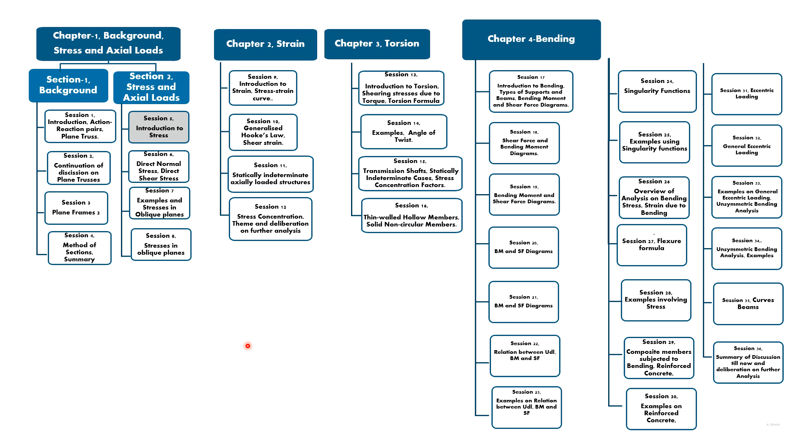Here we give a preliminary understanding of the scope of mechanics of materials. Mechanics of materials discuss and study the effect and behavior of structures under different types of loads and different magnitude of loads.

Structures are built to withstand loads. These loads may be axial loads, moment, torque, shear, or a combination of these.

The study of mechanics of materials can be categorized in 2 ways. As per the first categorization, mechanics of materials can be considered a study of strength, deformation, or stability.

Since structures are subjected to loads, one needs to understand the strength of such structures. Structures deform under loads. Such deformation cannot be excessive.

Excessive deformation adds to safety concerns. Excessive deformation may result in malfunctioning of equipment as well. Long, slender columns buckle under compressive loads, so we need to study stability as well.

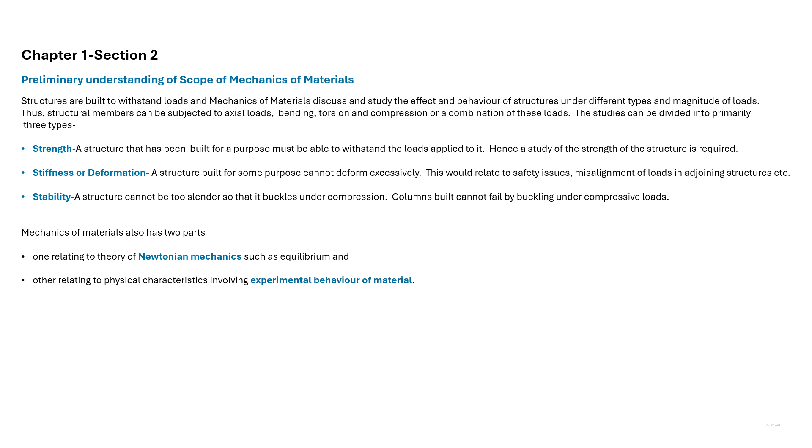Loads and stress cause deformation and failure, and we'll study deformation and failure. Loads and stress affect stability, and we'll also study stability.

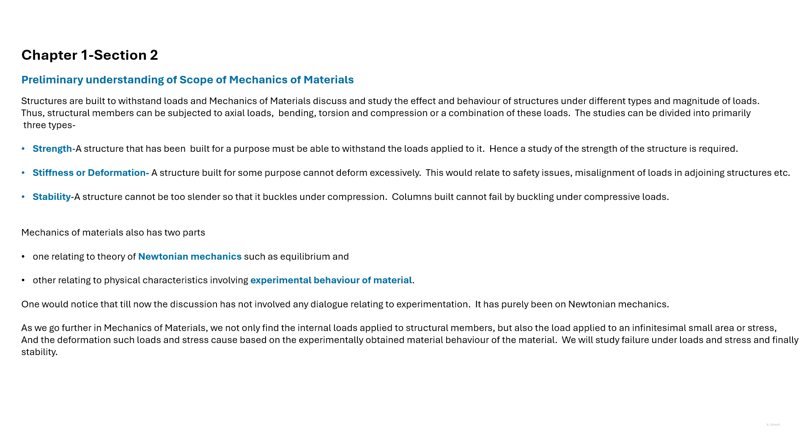Here we discuss the method of sections for arbitrary bodies. We have earlier discussed the method of sections for plane trusses. In order to discuss the method of sections for plane trusses, we initially considered the case of a rope subjected to tension T. So here we will recap the discussion first and then go to method of sections picking arbitrary bodies.

So here we have a rope AB and it is subjected to a tension T. C is any point, any arbitrary point within AB. Now if you cut the rope at C and introduce a spring scale, the whole rope still under tension T, then the spring scale will show a tension T.

That means that AC is under tension T and CB is also under tension T. And there's an action-reaction force pair that is acting at C.

Now instead of taking a section at C, if we consider an imaginary section at C - now C can be any arbitrary point - then at the point C, there's an action-reaction pair acting. So AC is being pulled internally by CB using tension T.

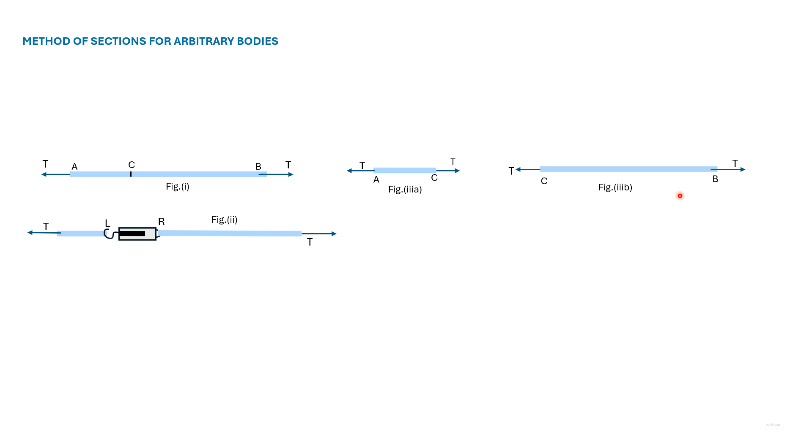In the earlier slide, we discussed method of sections. Till now, we have used method of sections to analyze plane trusses only. Here we consider method of sections applied to an arbitrary body. So this is an arbitrary body on which there are 5 forces acting, and we take the section ABCD.

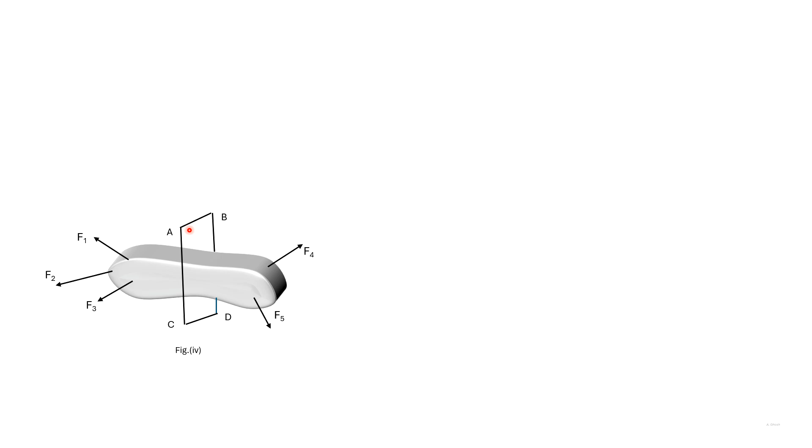Here we have the 2 portions. Then there will be action-reaction forces acting where we have taken the section. So here S1 and this S1 are an action-reaction pair. S2 and S2 are an action-reaction pair, and same with S3.

The number of internal forces is arbitrarily chosen here. The left portion will be in equilibrium under these external forces and these internal forces.

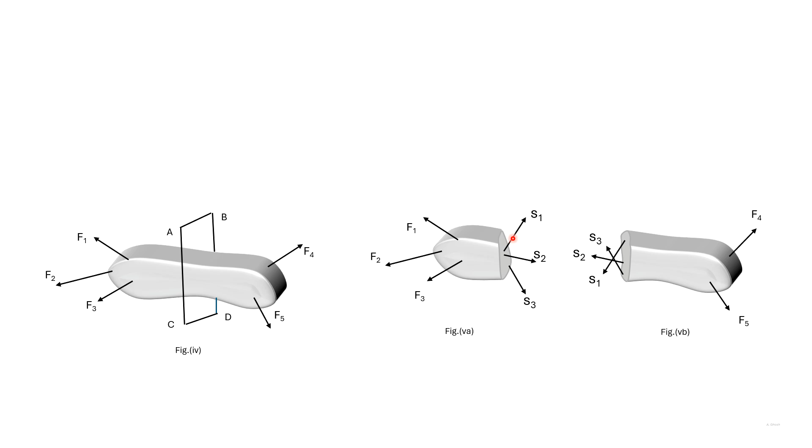The method of sections can be applied not only to forces like here, but also to moment or torque applied to bodies. A common phrase related to method of sections is, if the whole structure is in equilibrium, then any part of it, considering internal forces, will also be in equilibrium.

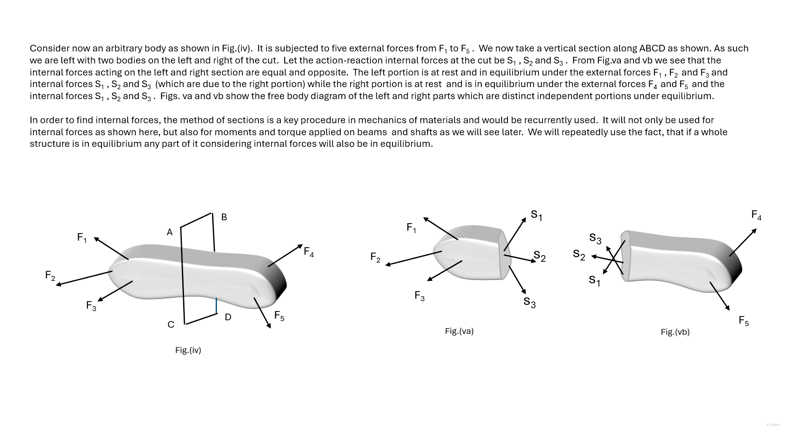Before we extend our discussions any further, we would like to mention that we assume that the material we are dealing with, when we are considering the different bodies, is homogeneous and isotropic.

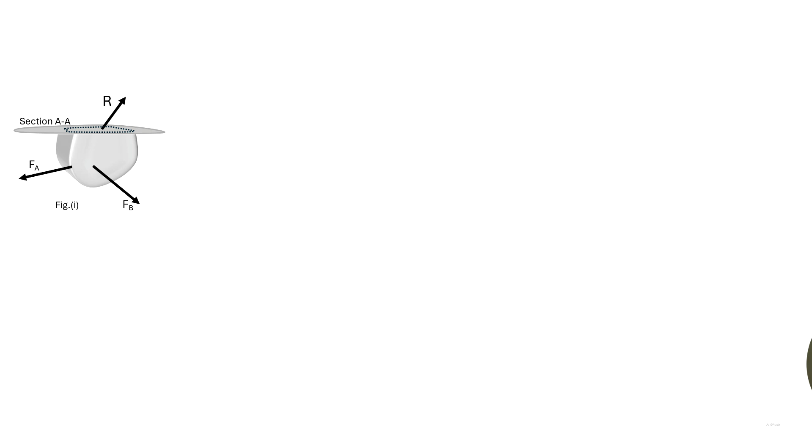Till now, we have discussed forces only. Thus, we have discussed external forces and internal forces. Here we introduce the concept of stress.

In the earlier slide, we took an arbitrary body subjected to forces. We passed a section through the body and considered that there were 3 forces acting on the section.

If we consider the left-hand portion of the body, then it would be in equilibrium under external forces and the 3 internal forces. The 3 internal forces can be replaced by a single resultant acting on the section. Here we have a portion, and R is the resultant acting after taking a section AA. The portion is in equilibrium

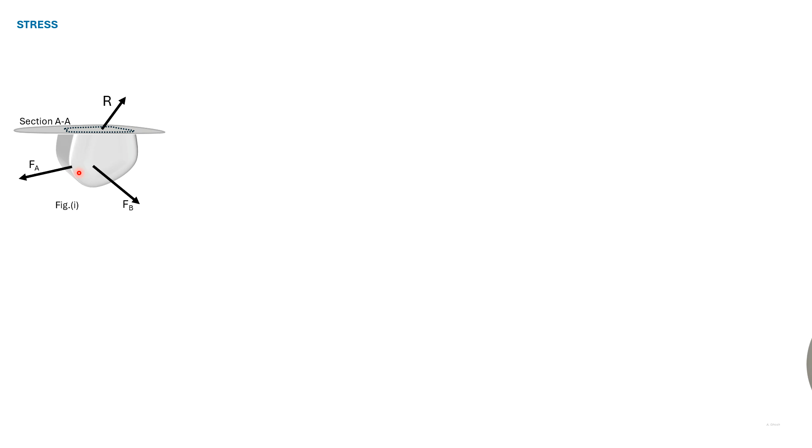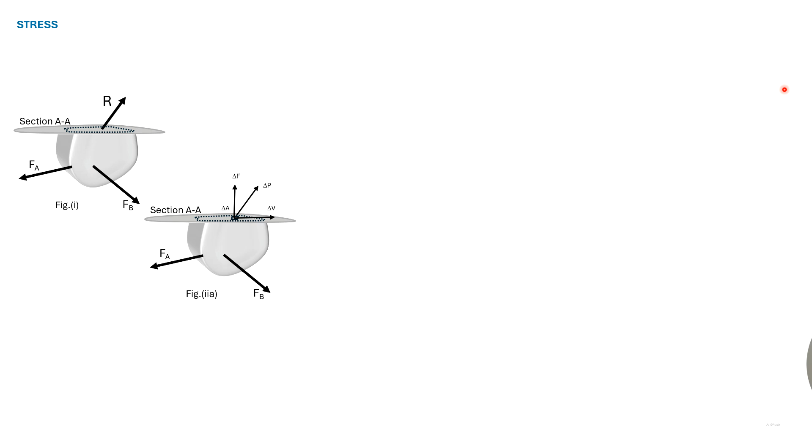due to forces Fa, Fb and R. Now the resultant R is due to small forces acting on small areas throughout the section A. Let us consider a small area del A on the section A, and let del P be the resultant force acting on del A. Then the stress acting would be given as S is equal to limit del A tends to 0, del P by del A.

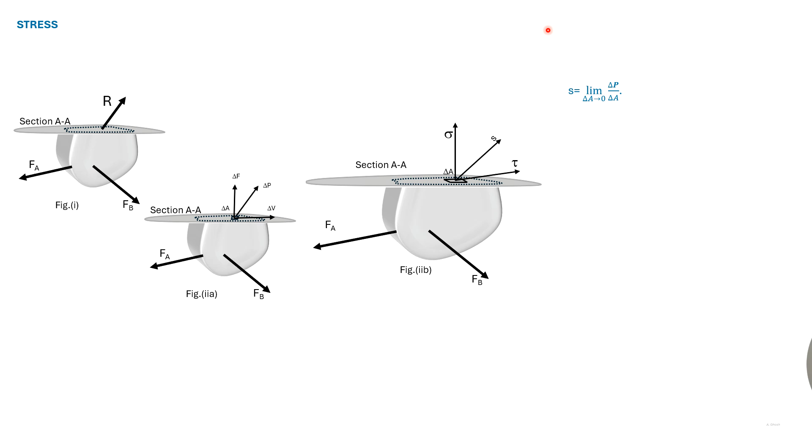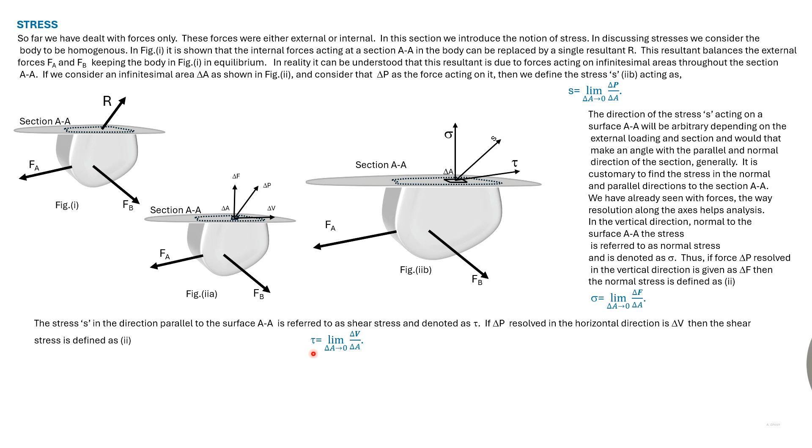We earlier saw that resolving forces in the vertical and horizontal direction is advantageous for analysis. So here we resolve del P into a vertical force del F and a horizontal force del V. Del F is normal to the surface and del V is along the surface. Then the normal stress sigma is given as limit del A tends to 0, del F divided by del A. And the shear stress denoted tau is equal to limit del A tends to 0, del V divided by del A.

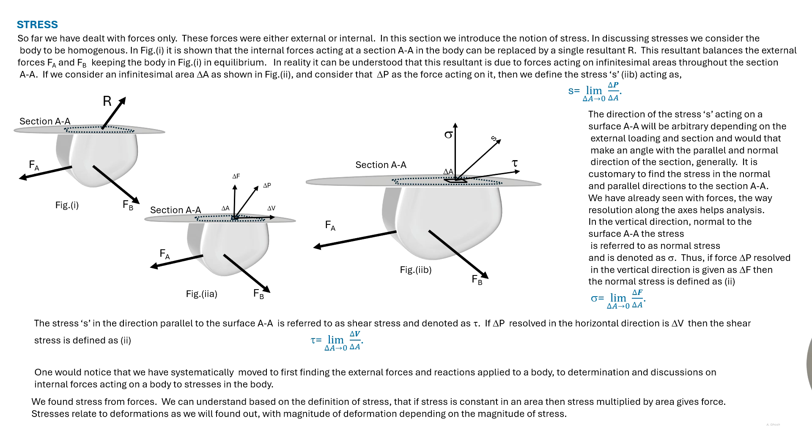We have thus systematically moved from external forces to internal forces and now to stresses. Earlier we discussed general stress and normal and shear stress at a point in a body subjected to loads. No mention was made of a coordinate axis. We realized that an infinite number of planes can pass through a point. As such, infinite values of stresses can be given at a point.

In order to give the state of stress at a point M in a body subjected to loads, we first assign a coordinate axis as shown here. We then consider an infinitesimal cube or cuboid at that point. The cube or cuboid considered has its faces aligned with that of the coordinate axis. We obtain the stresses on the faces of the cube or cuboid parallel to the coordinate axis. These stresses can be normal or shear stresses. We also designate or give a name to the stresses.

If 2 points in a body have the same stresses on all the faces in magnitude and direction, then these 2 points can be considered to be identically stressed. We can also compare the stresses between 2 points by comparing the stresses acting on the elements.

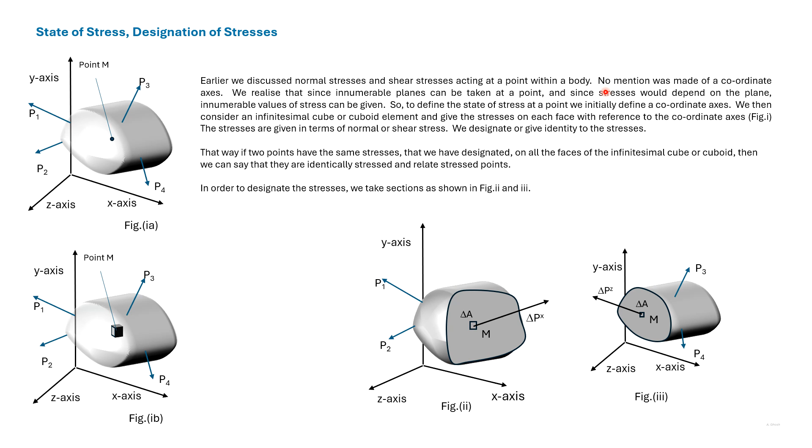We are in the process of defining and designating the stress at a point in a body subjected to a number of forces. So here we define and designate the stress at the point M. In order to do that, we pass planes and represent the general forces acting around a point in terms of normal and shear forces parallel to the axis. We then define the stresses related to the coordinate axis. So here we start with the YZ plane. We have taken a section that is parallel to the YZ plane passing through the point M.

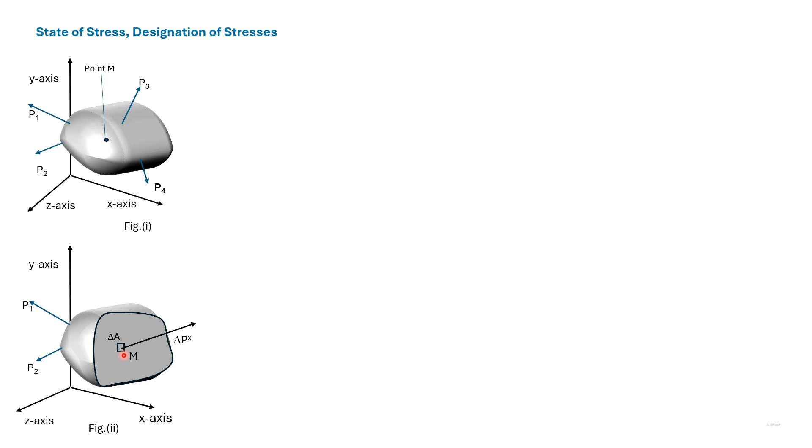Let us consider an area del A about the point M and let the force acting on that area be del Px. Now we can resolve the force into a force that is normal to the plane, del Fx, and a force that is parallel to the plane, del Vx. While del Fx is in the direction of the x-axis, del Vx is not in the direction of any axis.

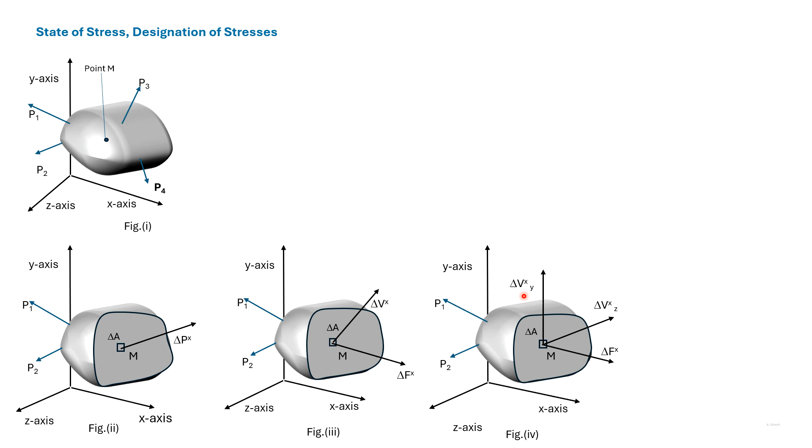So we resolve del Vx again into del Vxy and del Vxz, which are aligned with the axis. Del Fx is a normal force, del Vxz and del Vxy are shear forces. Now, if we let del A tend to 0, then Sx is equal to limit del A tends to 0, del Px divided by del A.

Sigma x is limit del A tends to 0, del Fx divided by del A. Tau xy is limit del A tends to 0, del Vxy divided by del A. And tau xz is limit del A tends to 0, del Vxz divided by del A.

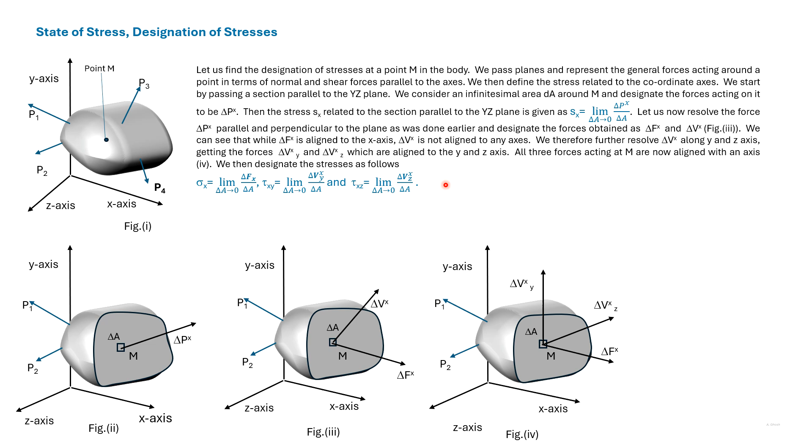We are in the process of defining the state of stress at a point M in a body subjected to a number of forces with respect to a coordinate system.

We have already defined and designated the state of stress corresponding to one plane, the YZ plane. Thus, corresponding to the YZ plane, the stresses acting are a normal stress that acts parallel to the x-axis and two shear stresses, tau xy and tau xz, that act parallel to the y and z axis.

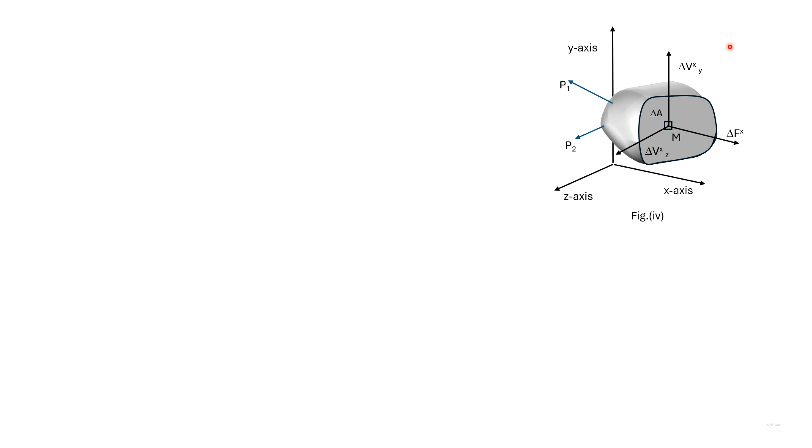We will now define the state of stress acting at point M with respect to the xy plane. So here we have taken a section of the body parallel to the xy plane and passing through the point M. As earlier, we take a small area around M and the resultant force is del Pz.

If the resultant force is del Pz, then we resolve the forces into three directions that are parallel to the axes. So del Fz is a normal force parallel to the z-axis, del Vzy is parallel to the y-axis, and del Vzx is parallel to the x-axis.

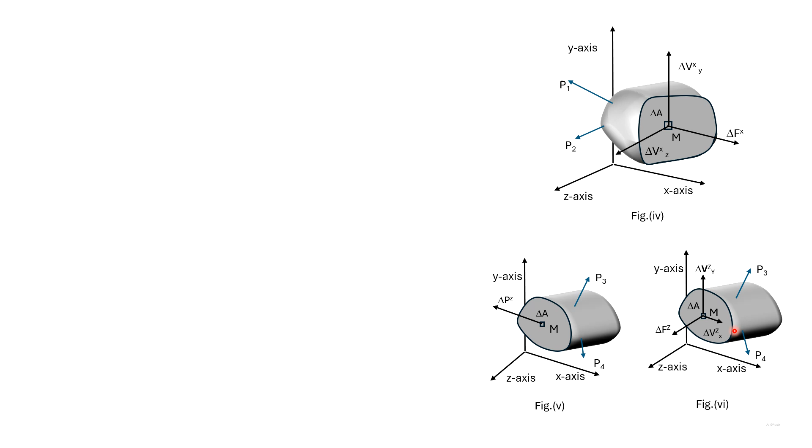The corresponding stresses are given as follows. Sz is the limit as del A tends to 0 of del Pz by del A. Sigma z is the limit as del A tends to 0 of del Fz by del A, and we also have tau zx and tau zy corresponding to the shear forces.

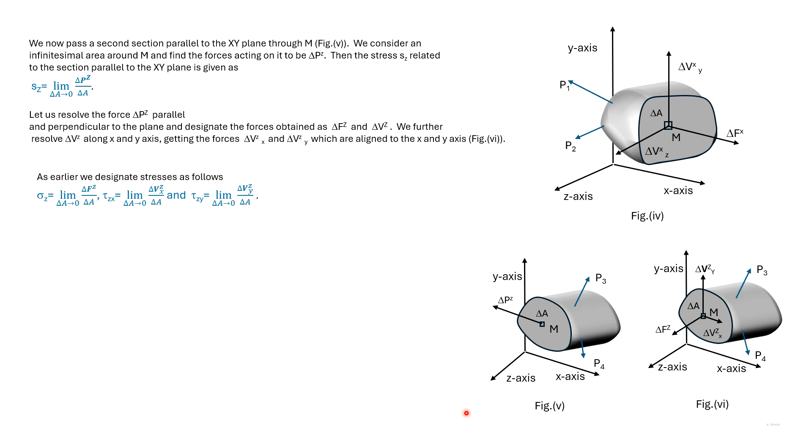In a similar manner, we can take a section parallel to the xz plane, passing through the point M, and we can find a force del Py. So then Sy would be given as the limit as del A tends to 0 of del Py by del A.

After that, we can resolve del Py into three forces, as we have done in this case, and we'll get the corresponding stresses as sigma y, the limit as del A tends to 0 of del Fy by del A. Now tau yx is the limit as del A tends to 0 of del Vyx by del A, and tau yz.

So now we have defined and designated the stresses at point M due to all the three planes corresponding to the coordinate axis.

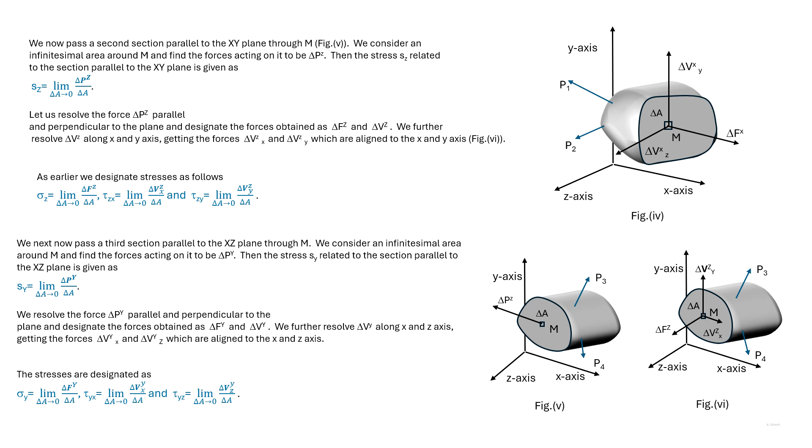Earlier we found the stresses parallel to the three planes of the coordinate axis at the point M. This diagram shows how we found the stresses parallel to the YZ plane. Thus we found the stresses parallel to the YZ, XZ and XY planes.

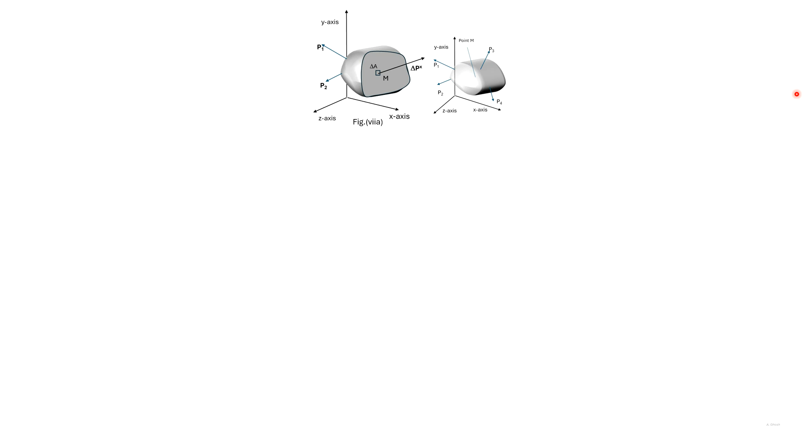The stresses on this plane are the same as the stresses earlier found by taking the YZ plane passing through the point M. Similarly, the stresses on this plane are the same as the stresses earlier found by taking an XY plane passing through the point M. And the stresses on this plane are the same as the stresses earlier found by taking an XZ plane passing through the point M.

Now we found the stresses acting on the YZ plane by taking a section as shown in this diagram. However, we could have taken a section so that this portion of the body was there and this portion, or the portion to the left, was cut off.

Then the stresses we would have obtained would be equal and opposite to the stresses on this face. So we would have obtained the stresses on this face. Similarly, the stresses on the far face are equal and opposite to the stresses on the front face, and the stresses on the bottom face are equal and opposite to the stresses on the top face.

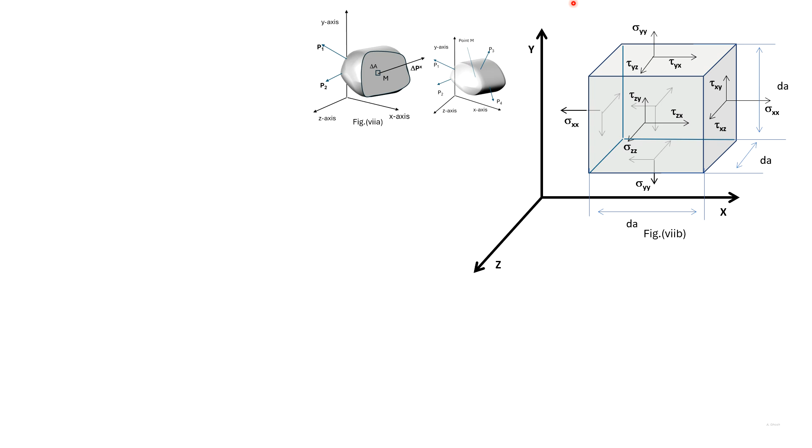This whole body is in equilibrium and the infinitesimal cube at point M is also in equilibrium. So now we have given the state of stress at point M. We now look at designation.

Here with tau xz, x represents the plane. So the first subscript represents the plane. X represents the YZ plane. And the second subscript, here it is Z, represents the direction.

Similarly, in tau yx, y represents the plane. So y represents the xz plane. And the second subscript, x, represents the direction.

We now look at signs of stresses.

This face of the infinitesimal cube has the highest x coordinate. The direction of stress is same as the x-axis, so we say the direction is positive. The case would have been the same if we were dealing with the negative ordinate.

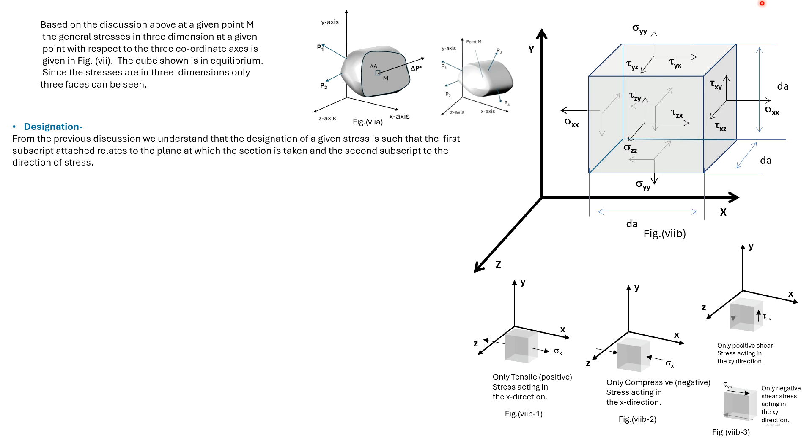We earlier gave the state of stress at a point in a body subjected to loads. This is the three-dimensional state of stress given. We see that there are 9 types of stresses acting on this cube. Out of these 9 stresses, 3 are normal stresses and 6 are shear stresses.

Often in practice, the stresses associated with the z direction are not present. So sigma zz, tau zx and tau zy are not present.

We earlier mentioned that tau zy and its counterpart on the opposite face cause a couple which is negated by tau yz and its counterpart on the opposite face. So if tau zy is 0, then tau yz is also 0.

Also, tau zx and its counterpart on the opposite face cause a couple which is negated by tau xz and its counterpart on the opposite face. So if tau zx is 0, then tau xz is also 0. We are thus left with these stresses acting.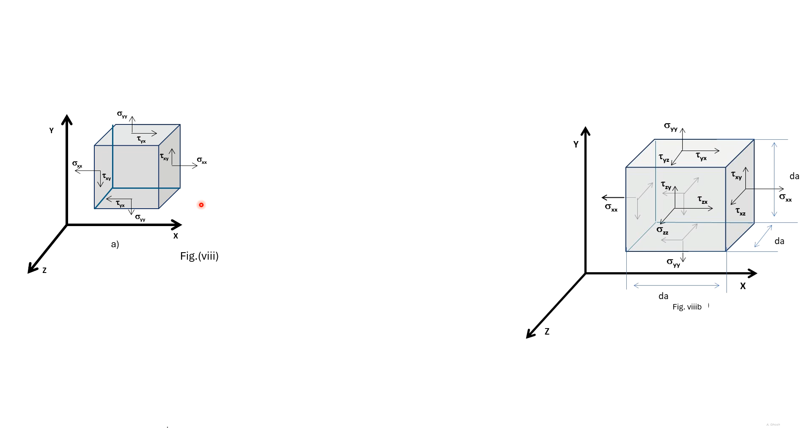These stresses are often given in a two-dimensional diagram. This two-dimensional diagram is common and will often be used in different chapters. We now show a relationship between two of the shear stresses using this two-dimensional diagram.